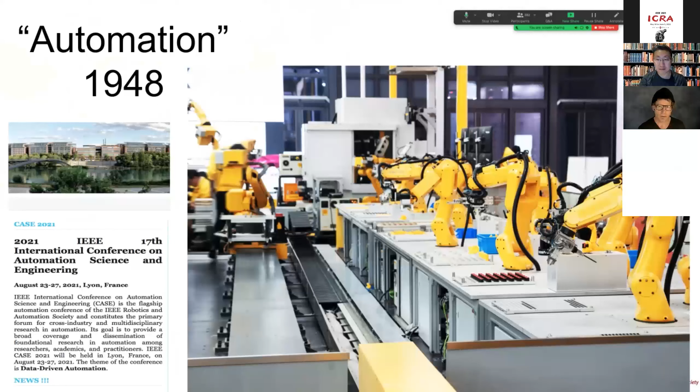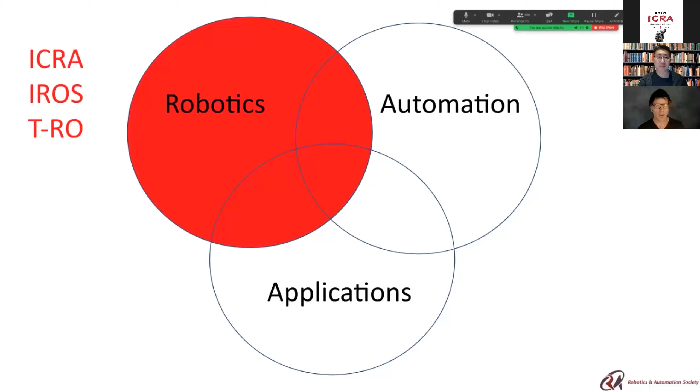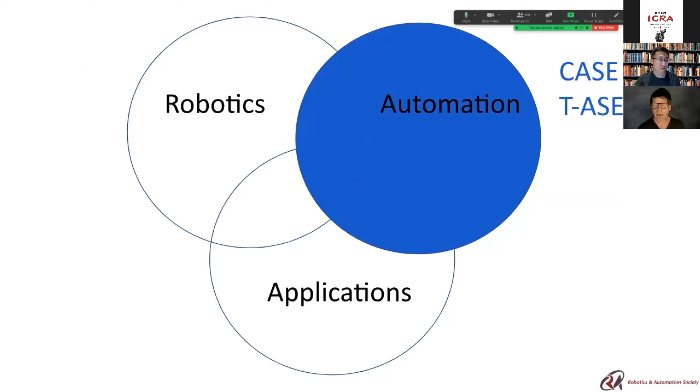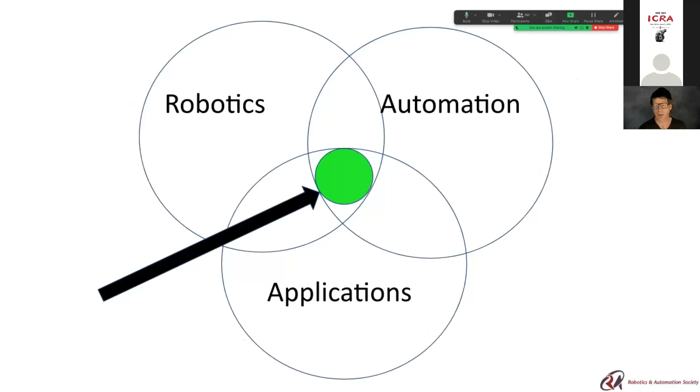So this is how we're thinking about it, that we have these 3 components: robotics, automation, and applications. Robotics, of course, is represented by the conferences, this one, ICRA, also IROS, and the transactions on robotics. And automation is represented in our society by the Conference on Automation, Science, and Engineering, CASE, and the transactions. What we want to emphasize is the excitement and potential for research at the intersection of these 3 elements.

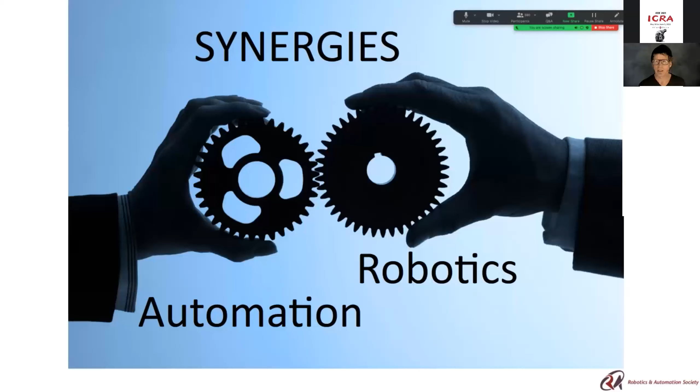So this is what we mean by synergies, namely when we start to think about robotics and automation coming together and interacting in constructive ways. One of them is in the commercial sector.

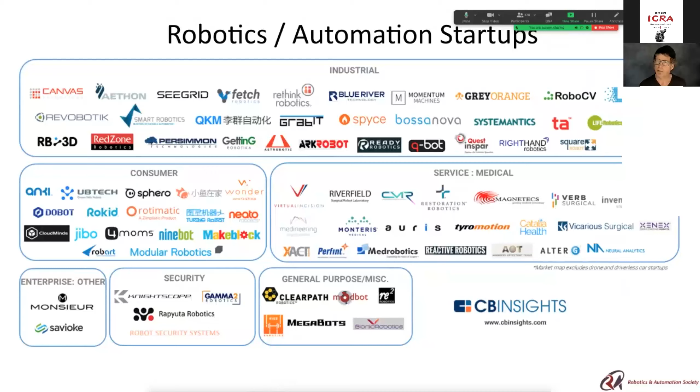Many of you are familiar with the many startups that have evolved over the last few years related to robotics and automation. The idea is essentially that automation is required to take the innovations that sometimes come out of robotics and make them more efficient, more cost-effective, more practical, more reliable. So there's a very natural synergy here. When someone starts a company, a young roboticist starts a company, they very quickly find themselves doing automation.

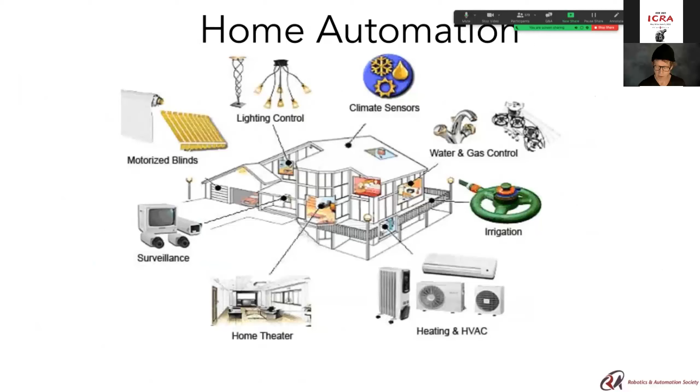Now, the term automation is very widely used in context of home automation. And we're familiar with the advances that are happening here in home automation, which are extremely exciting and starting to evolve with the advent of devices such as the Alexa and Google Home. And I also want to recognize a very exciting new project that's emerging in Japan.

The Toyota Woven City is a new project to build an entire city area that is designed for robotics and automation. Again, the idea of woven is that they're combining the elements of these two very important disciplines.

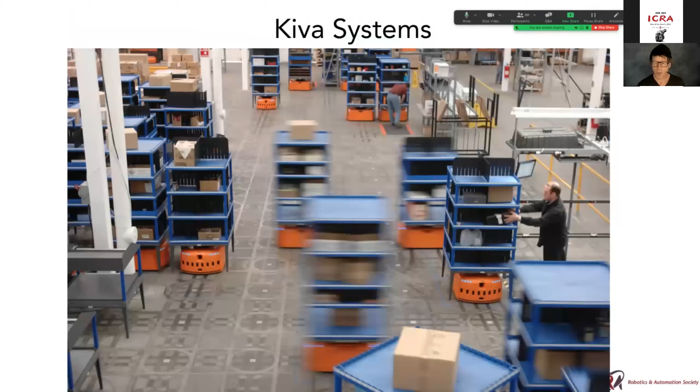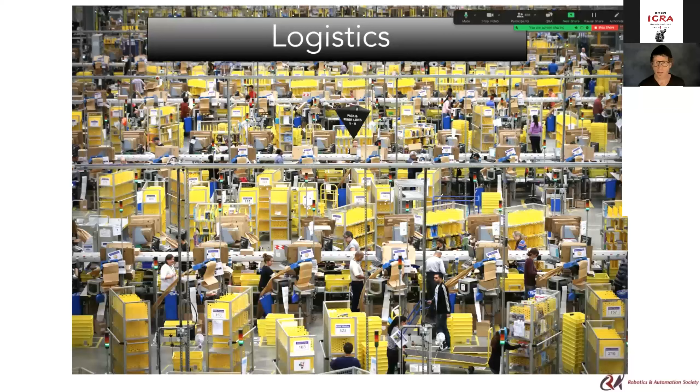We also see it in the success story of the company Kiva Systems, which has been used in warehouses now around the world. And more broadly, I see logistics as a sweet spot for robotics and automation. It's where advances in grasping and manipulation are starting to become widely applied to the growing problem of meeting the increased demand for e-commerce that has arisen during the past 18 months over the course of the COVID-19 crisis.

Now, there's a number of well-known players from around the world who think about robotics and automation, sometimes controversially. If you think about Elon Musk, he's a huge fan of robotics, and Zuckerberg has a robotics division. In a sense, though, they are both very deeply enmeshed in automation.

There's also a number of books that address the issues around automation, and often critically. So it's important for us to develop a dialogue around these topics and think about what it means for broader societies.

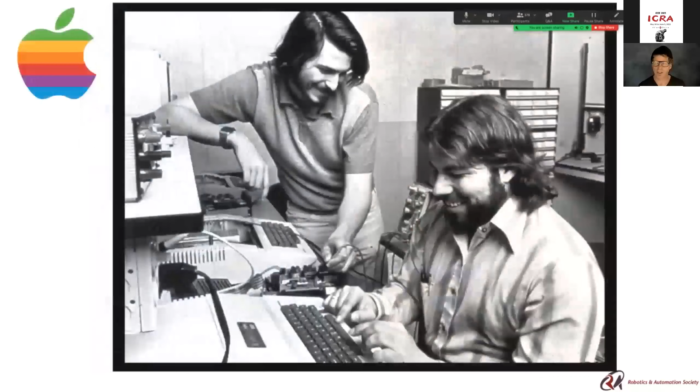Now, my favorite analogy is with these two gentlemen, the synergy between the two of them. Steve Jobs was very charismatic and very good at design and communication, but he couldn't have succeeded without Steve Wozniak, who was, in some sense, the person who got things to work, actually built the circuit boards, built the systems, and fine-tuned them and made them efficient. So that's what I think of as a great synergy, a great partnership between automation and robotics.

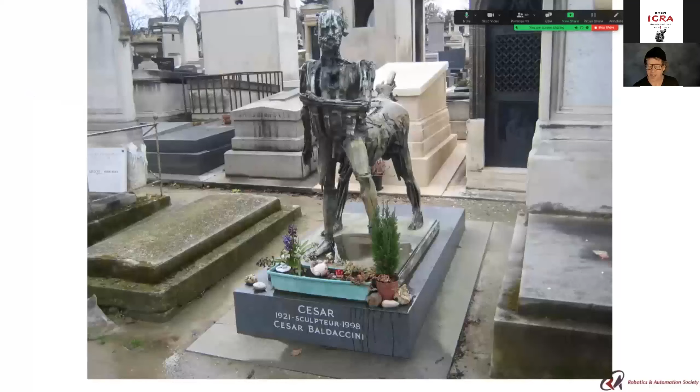So I'm going to turn the floor over to our president, and I just want to acknowledge another César, the sculptor based in Paris, who is well known for his sculptures on metal works and various kinds. And I'll turn it over to our esteemed leader, Seth Hutchinson.

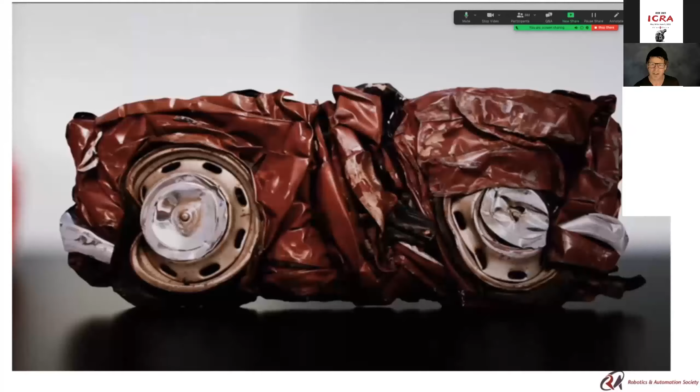Seth? Thanks, Ken. You can advance one slide. So I'm going to give you just the old guy's view of robotics and automation and how we came to be where we were.

If you joined this community in the last decade, even since the late 2004, 2005 time frame, you have always known us as two societies that somehow exist together, a bunch of robotics people and a bunch of automation people. And you may wonder, why did that happen? Why did this group of people decide to work together in the first place?

The answer is we started working together a long, long time ago. We started in 1984 as a council. And in those days, robotics and automation were really tightly coupled. If you were doing applications in robotics, there was a super high probability that the application was automation. If you were working in automation, there was a very high probability that you were trying to get robots to do things repeatedly, very predictably in factories, to assemble things or build cars. And that continued for quite a while.

A lot of the robotics research done by people of my generation, whether you were doing dexterous manipulation or intelligent planning, no matter what, you were using a robot that weighed a couple thousand pounds and was made to assemble cars in factories. So that was sort of the way robotics research was done, at least for manipulator arms back in those days.

In the 1990s, things really started to change. A lot of technologies began to mature very quickly, and at the same time, computers got super fast, and all the mechanical stuff got better as well. And so robotics started to move out of the factory to a lot of other applications, and automation started considering a lot of problems that weren't necessarily robotics-centered problems.

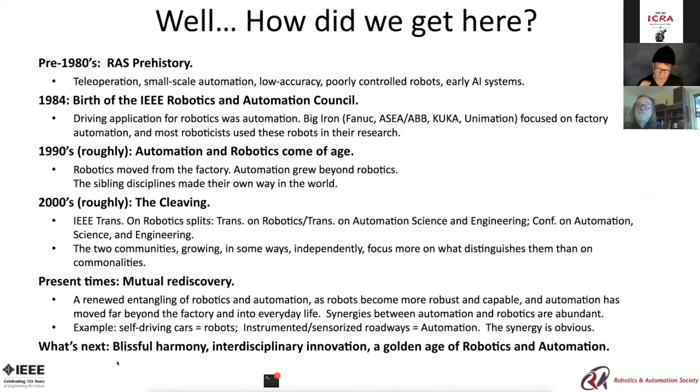Yes, I would like to start with just a review of the history of automation. The term automation is inspired by the word automatic, coming from automaton. The starting point of automation is the use of different control systems. And the simplest type of control system is obviously the open loop, the control loop.

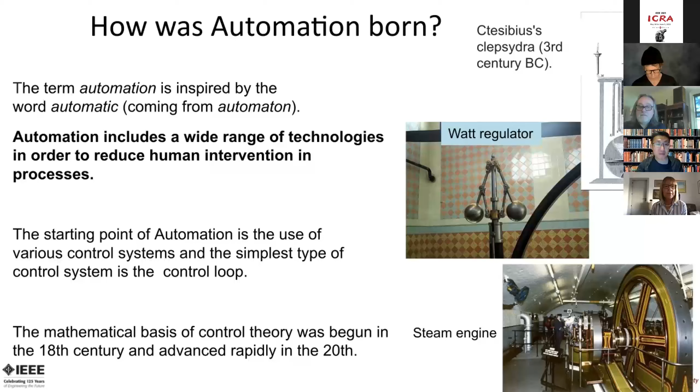The mathematical basis of automation started in particular with the main advances in the 20th century. Different issues are very important: for instance, differential equations, frequency domain analysis, stochastic analysis, nonlinear control, digital control, and so on. But in 1947, Ford used for the first time the word automation and established an automation department when, in his industry, he adopted the feedback controller.

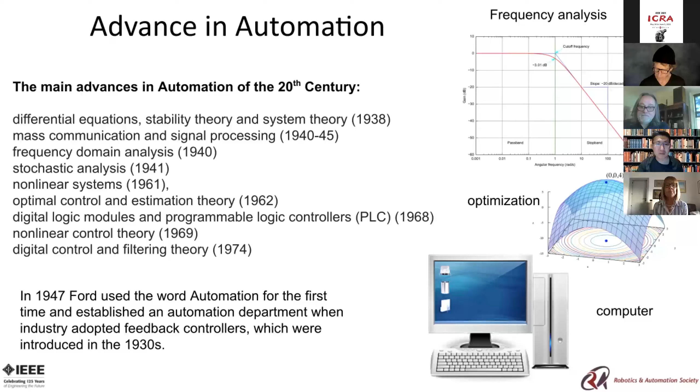Next slide. And now the modern automation tools. Modern automation tools are artificial intelligence, machine learning, IoT solutions, digital manufacturing, 3D printing, big data, optimization, simulation, and digital twins. Today, automation describes a wide range of technologies that reduce human intervention on the basis of predetermined decision criteria.

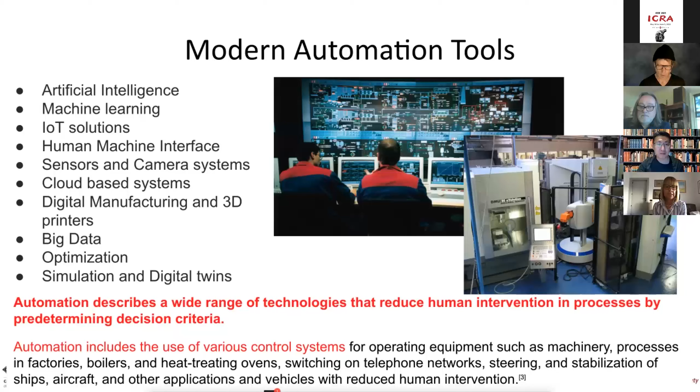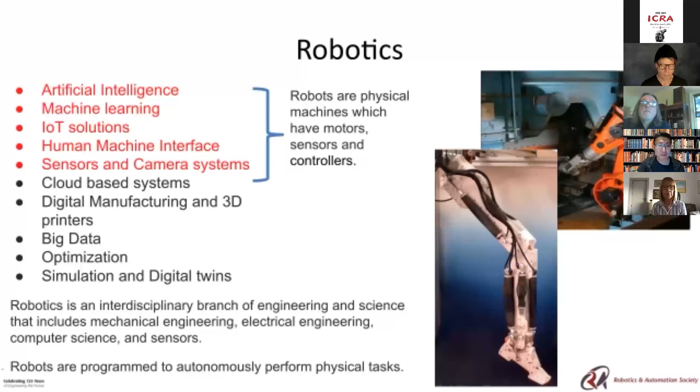Next slide. Today, automation includes some enabled technologies that are in common with robotics. For instance, artificial intelligence, machine learning, IoT solutions, human-machine interface, sensors, and camera systems. These are some technologies that are in common with robotics. Robotics can be defined as an interdisciplinary branch of engineering and science that includes mechanical engineering, electrical engineering, computer science, and sensors.

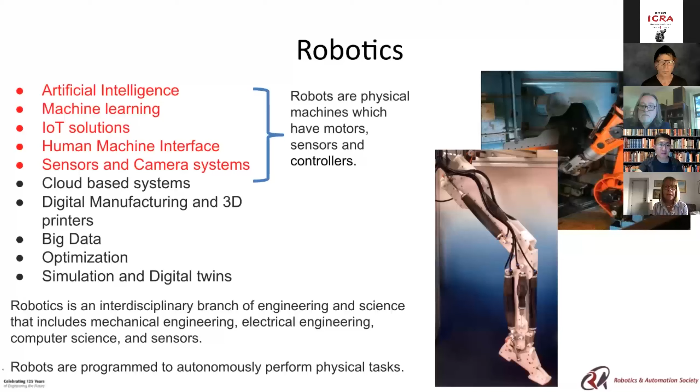Next slide. Now, it is evident that there are very large synergies between robotics and automation. Automation includes intelligent transportation systems, smart building, construction, waste management, video surveillance - applications that can be viewed as intelligent machines and intelligent systems that are not typically robots. So the synergy is very large, but also there are some fields that we cannot include in robotics.

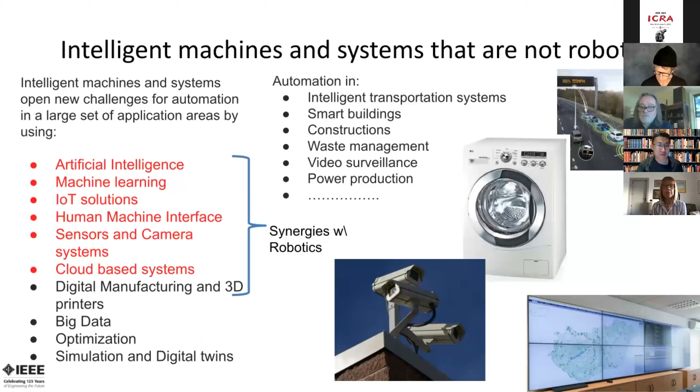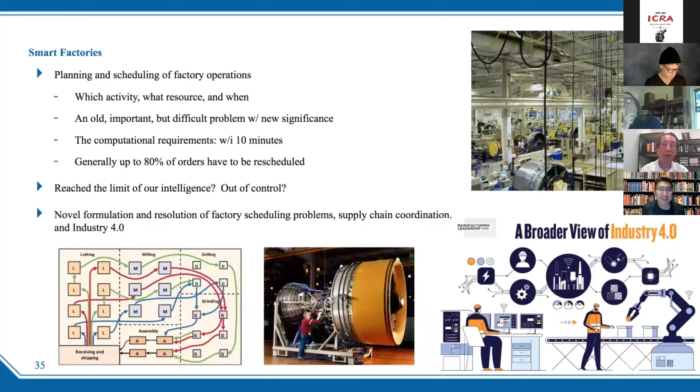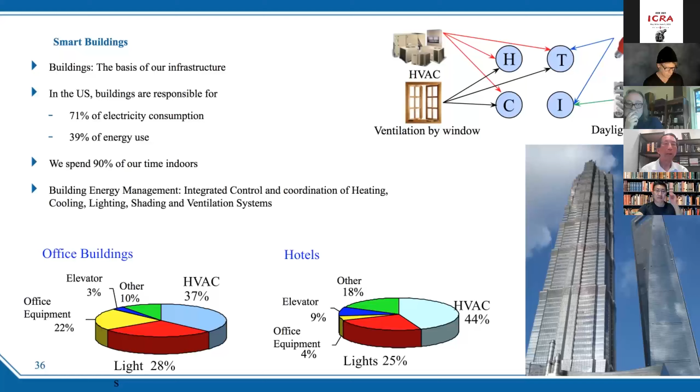So looking at what Ken and Maria Pia said, because of Internet of Things, AI, machine learning, optimization, big data, and robotics, now in addition to routine labor work being replaced, non-routine tasks and decisions are gradually being replaced. It's an exciting era for automation and robotics.

Thank you, Peter. And in fact, I greatly appreciate your point, and that's exactly what Seth has done. We have this new committee, the CSR, Committee to Explore Synergies Between Automation and Robotics. So that's what we'll be doing over the next few years. And I'm happy to say that Frank Park, the next president, is also very supportive of this. We'll hear from Frank in a few minutes.

Next, we have Pieter Abbeel, who will give us a mid-career perspective on this intersection between robotics and automation. Thank you, Ken, and hello, everyone. Thanks for joining us. So, as I was thinking about this automation and robotics relationship, for me, they really go hand in hand.

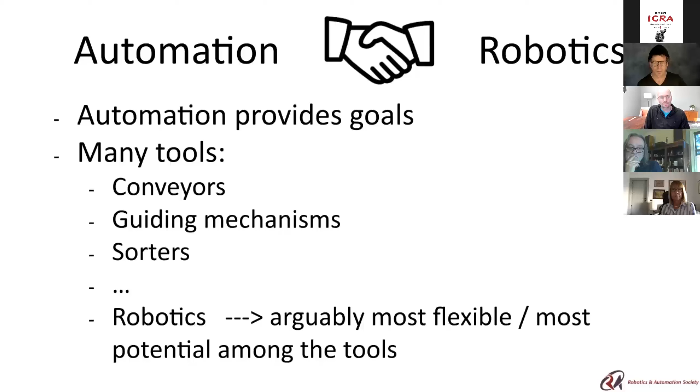Next slide, Ken. One of the big reasons I'm particularly excited about automation, and there's also something Ken alluded to, is that I think it provides some of the biggest near-term opportunities for real-world robotics. So even if what you care about the most in your heart is robots, and you'd like to see them actually do something in the real world, automation provides a lot of opportunities.

To give you some examples: recycling. Of course, we should be recycling more. Some statistics here - 80% of the trash that goes into our landfills actually could be recycled. But of course, it has to be done, and how are you going to get it done? 30% of the produce grown in our fields is actually not harvested - again, because it has to be done, but there's nobody to do it.

And the warehouses that we all rely upon to click on something online and get things delivered at our door, especially this last year and a half, the workers there have a 7% injury rate on a yearly basis and 100% turnover, meaning that people switch to a different job - effectively 100% of the people on a yearly basis. So there's a lot of need in all of these three sectors and many more to bring automation, to bring us the kind of wealth that we want in the world for everyone. Somehow we need automation to help out.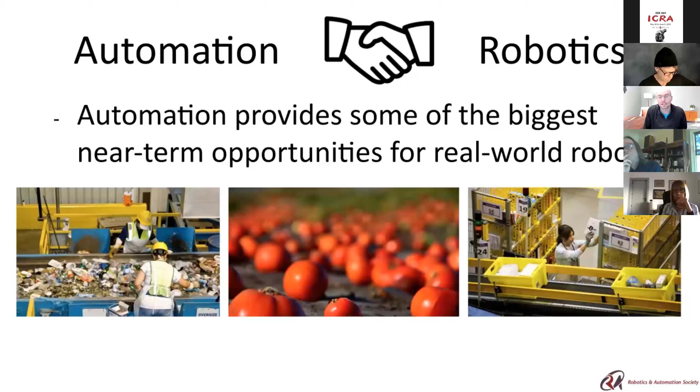Next slide, Ken. So automation is what I think of as real world problem solving. It's holistic problem solving. It's okay if the robot is only part of the solution. It's okay to use other tools, but the full solution needs to be viable.

And in fact, that can include, and will pretty much invariably these days include, thinking about the human as part of the solution—human and robot, or human and other tools together, making sure things work. Because in automation, reliability tends to be key. And it's actually, I think, a big overlooked opportunity in research to really pursue high reliability.

If you look at most papers, once somebody achieves 80, 90% reliability on a task, they're pretty happy, and they might move on to a different research agenda, a different problem. But for real world deployment, that's not enough. You need many nines of reliability. And that will require a different kind of thinking, different breakthroughs that we don't have yet.

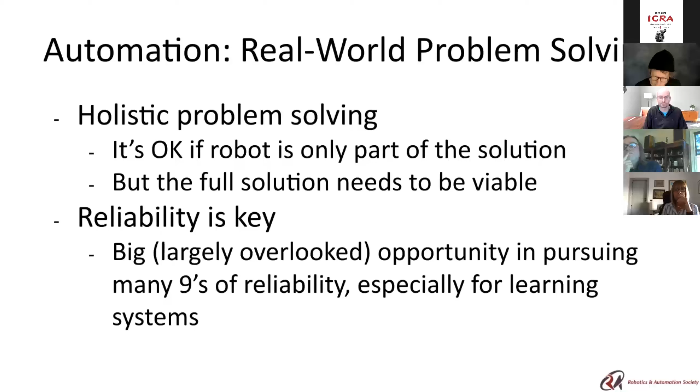Thank you, Pieter. Really appreciate your perspectives here, especially bringing up ideas like recycling, which is so timely today, and also your connections with human-robot interactions and the potential for reliability research. So thank you for that talk and perspective.

Next, we'll hear from another mid-career researcher, Kanako Harada. Kanako? Thank you very much. And it's my great honor to be part of this wonderful panel.

I'd like to share my view by taking an example of lab automation and autonomous robots for lab tasks, and I'm going to highlight the differences. Lab automation is designed to provide a solution as a whole package, for mass production and small variation applications, and works in a known and controlled environment. Such an automation system can work in a real scenario.

In these days, lab automation needs to become more adaptive for small production with large variation. In contrast, autonomous robots for lab tasks are designed by focusing on one difficult task, and therefore small production with large variation applications, working in environments with uncertainty. Unfortunately, most of such robots are demonstrated in simulated scenarios. Now such autonomous robots need to be implemented in real-life solutions. So synergies between automation and robots are really necessary.

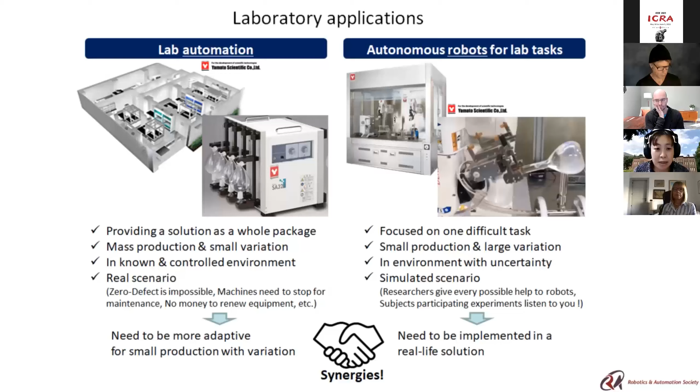Next, please. Thank you. In fact, some months ago, we launched a new project called Moonshot, targeting science discovery. We have discussed a lot about automation, robots, and humans. We think that autonomous robots capable of research automation, which requires looping of hypothesis, planning, testing, and analysis, can co-evolve with humans to do science discovery.

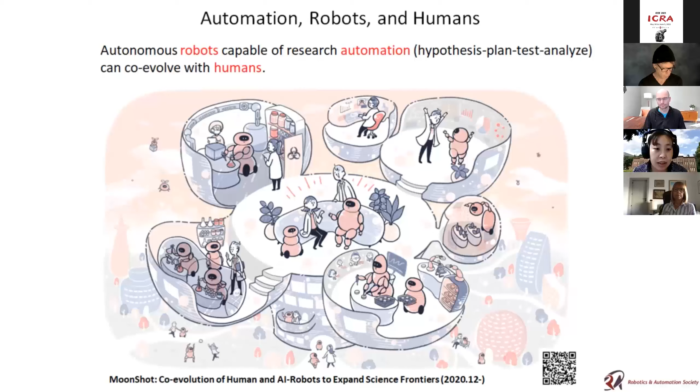We are discussing what robotic and automation technologies can realize this vision. We think that we need to study two types of intelligence: one for automation of the research or discovery process, and the other for robot autonomy. With such intelligence, robots can interact with humans. We also discussed that robots and automation technologies are not to replace humans, but to help humans go beyond human limitations—to overcome environmental barriers, information barriers, and physical barriers—to have a complementary relationship with humans. I think our community is the best place to discuss such a wonderful future. Thank you.

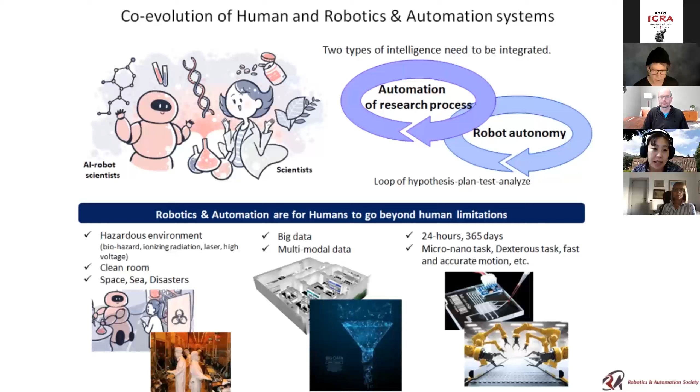Thank you, Kanako. I really appreciate this idea that automation can be used for discovery, and that it can be used in labs, and as we heard from Rob Wood this morning in his terrific opening plenary, it can be used for discovery in oceans and hostile environments. This is a very nice relationship to robotics and automation again, where automation has to continue reliability at extreme conditions.

Next, we'll hear from the current editor-in-chief of the Transactions on Automation Science and Engineering, Michael Wang. Michael? Thank you, Ken. I will just share with you my view on the synergy between automation and robotics, some of which have been shared by other members.

You probably have heard this saying that one robot is robotics, millions of robots are automation. We all know every year there are thousands of robots being sold, a lot of them in China, and there are now more than a million robots being deployed. So once you have robots together, employed in industries or somewhere else, they form a community or facility, and therefore together they do automation work.

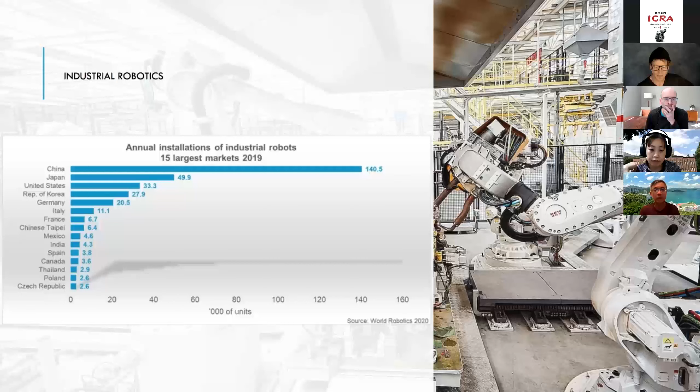Next, please. So the synergy is that the robot is not by itself—it's part of a system, either production or other purposes. There are a great deal of purposes for robots to perform in terms of automation. So I will briefly talk about three areas.

One is automated production, where millions of robots are used. The robots themselves have digital models, and they could be integrated for developing automation systems. They're also to make robots become smarter, more intelligent, more interactive. And we have new techniques involving sensors and AI. Next, please.

So in a massive production system, robots are part of the system. They are optimized, and their performances are tuned such that an entire automation system produces the most product in the most economical way. Reversely, giving the performance limits as well as other requirements such as reliability, the whole production system is optimized around whatever is in the system.

So in terms of the whole product design to product delivery, robot is a very important integral part of it. And there's a great deal of opportunity where the digital twin comes into play. We have virtual representations of robots as well as other production machines, and they are integrated to simulate the operational performance. With real-time data, we are able to tune the parameters of these machines as well as robots to make them more reliable and much more productive.

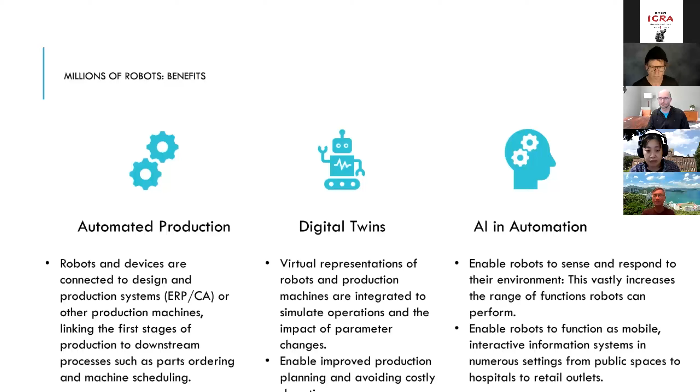Excellent. Thank you, Michael. I also want to give credit for that analogy to Raja Chatila, our past president of the Robotics and Automation Society, who made this point about one robot being robotics. When you scale robots to tens or hundreds or thousands or millions, that's when you get into automation. So this issue of the scaling transition leads us into automation. Next, we'll hear from Chinwe Ekenna to give us another junior perspective on this intersection.

Chinwe? Hi. I'm also going to give a little bit about what I think and what my view is about this synergy between automation and robotics. I'm going to take it from a slightly different perspective, where I'm looking into extending beyond to where there's actually a dire need.

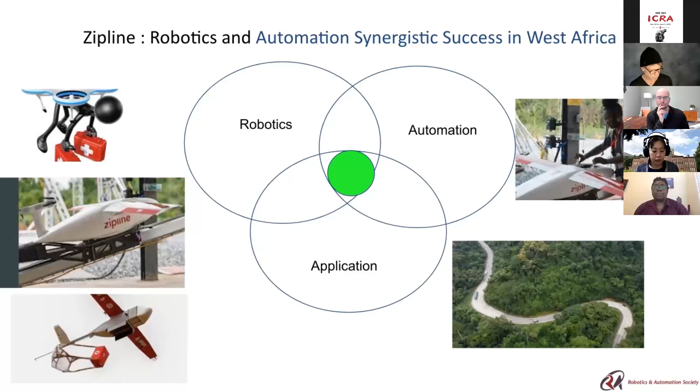So, next slide please. Even with that, looking at one of these preliminary successes we've had, there is actually a lot of room for improvement. There's a lot of room where we could have this kind of interaction become very useful and really make a change in people's lives.

Another area could be shipping. In some parts of the world, the bottleneck there is that a lot of work has to be done. So I'm bringing up some potential areas where we could see this synergistic process and prospects being very useful.

Agriculture is another one. There's a lot of research in robotics and agriculture, thinking about reapers, or automation within the farm, within the farming environment. Looking at agriculture even in these very remote areas, and how we can bring in robotics and automation, is something very worthwhile if you think about the near future. Healthcare as well, as we all know.

So this synergy basically has the potential to bring a myriad of positive changes in different sectors. Finance is also included. It will actually bridge the gap between physical infrastructure inadequacies in certain parts of the world and consumer demands, and it can free up some skilled labor, and in that sense also increase labor productivity. That's basically my view, really looking beyond towards where we could see a dire need and where the success of this synergy would actually come into play.

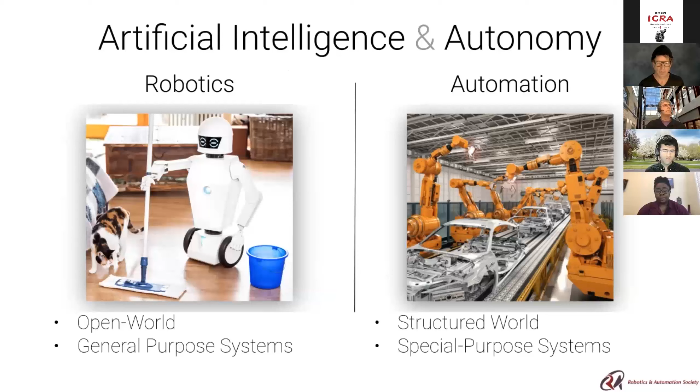However, over the last decade, progress in autonomy, improved hardware and sensing, and algorithms in AI have blurred these boundaries. In fact, I would argue the notion of AI itself is more about ambient intelligence to support the many spheres of our activity, whether it is at home or at work. These spaces will operate not only with robots as we know them, but probably also devices that are smart, in the sense that there are multimodal sensing, perhaps other modes of control. Your curtains are automated, or as Pieter pointed out, automated material sorting in a factory. In the same way robots are stepping out of the lab, we can also see automation is increasingly stepping outside the cage into applications with fewer structured constraints.

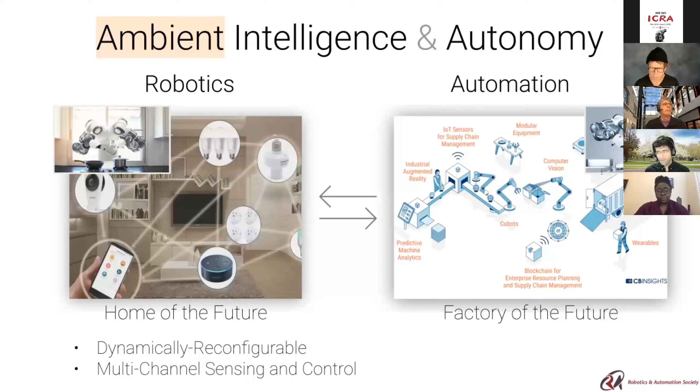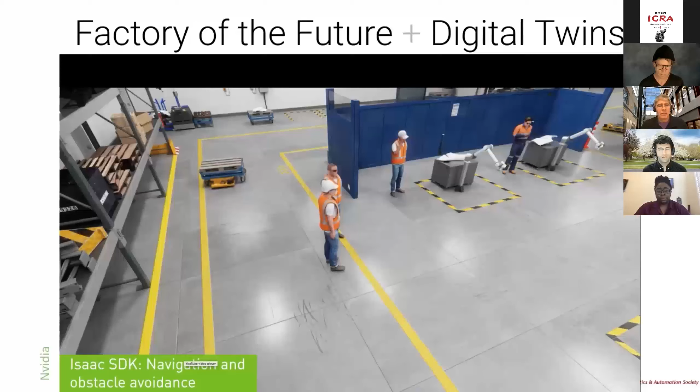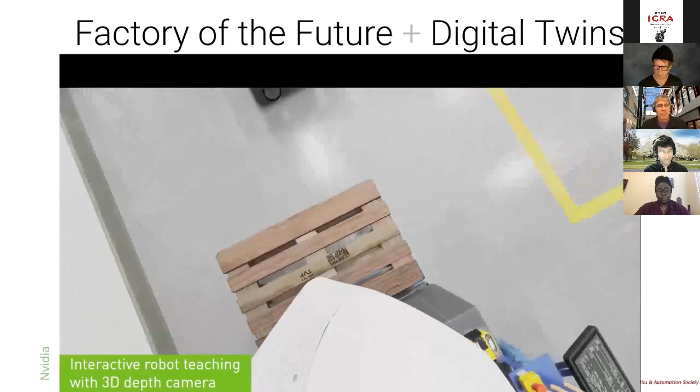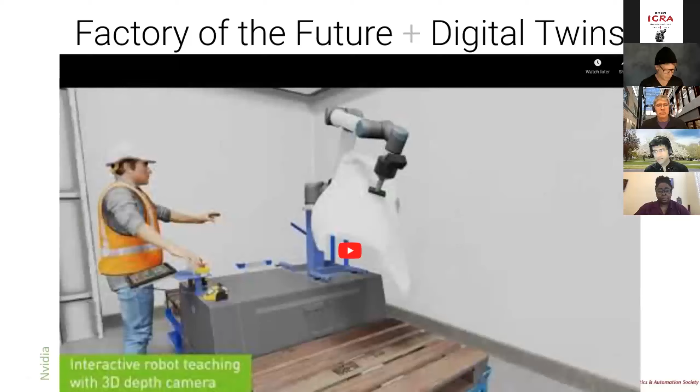So a classic problem we can use as an example is the factory. An automated factory needs operations that include material handling, assembly, finishing, which in turn may require autonomy in manipulation and mobility. Often roboticists may scope the problem to either just navigation or manipulation operations at a station, maybe grasping objects in a bin. On the contrary, automation may need to study the holistic problem of material handling in a factory, of which bin picking is definitely a very vital part, but it may also need to look at the context-aware decisions that need to be made in view of information coming in from many pieces of equipment in the factory. And now the things we're building in terms of these digital twins allow us to solve these problems jointly, both automation and robotics.

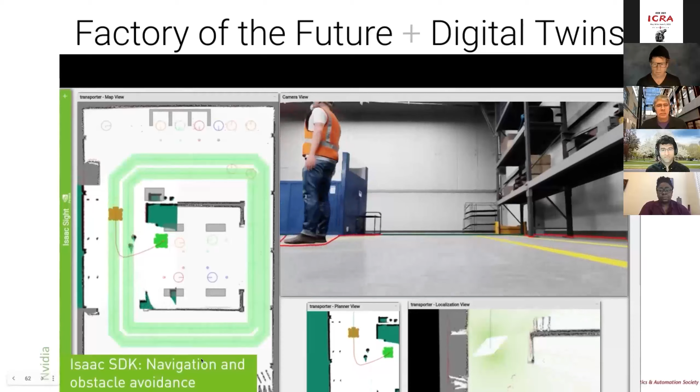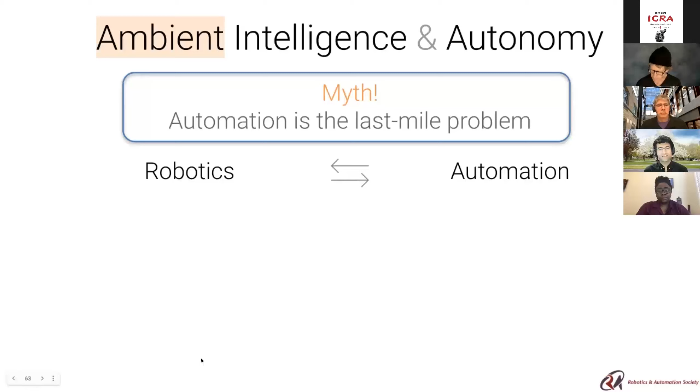As we build toward a framework of this ambient intelligence and autonomy, a myth that has plagued the community, I would argue, is that automation is a last mile problem, that it's just engineering. I would argue that actually both robotics and automation each have technical problems that are equal parts science and engineering. Robotics has technical problems such as how to build better decision-making systems, improve robot control and design, and also build a higher level of cognition and reasoning. On the contrary, automation has questions like how do we build context-aware awareness from network sensing and control, how do we build algorithmic methods for quality assurance, transfer and few-shot learning. Importantly, as Pieter pointed out, uncertainty quantification and even long-tail performance guarantees, to get the right number of nines we need. As roboticists, I would argue the path to achieving impact in our work is very likely going to be hand in glove with progress in automation.

To finish up on a lighter note, many of us in the robotics community have been solely focusing on building the Iron Man suit. But it wouldn't be half as impressive without the context-aware automated assistant that we call Jarvis. So I would argue that embodied AI in physical environments needs both robotics and automation, not one or the other. Thank you.

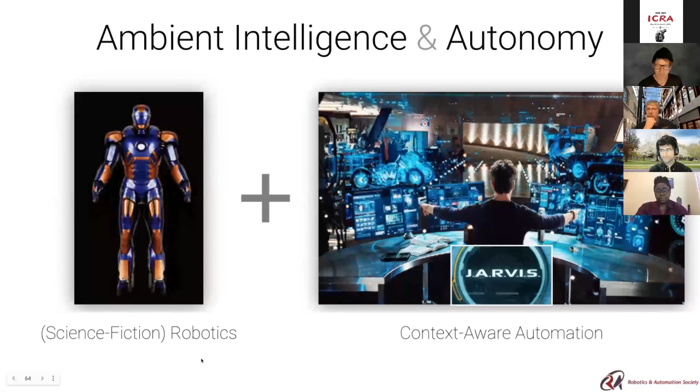I'll be brief. I would regard this event and others like it to be a failure if we just ended up congratulating ourselves and each other for our observations and insights about robotics and automation, and then we just went back to what we were doing before, and this event just becomes an archive video somewhere. We need concrete plans that put into action many of the great ideas that our panelists proposed.

Not only more discussions like this, but long-term sustainable activities that engage both the robotics and automation communities, especially our younger members. I hope that people who primarily consider themselves roboticists and only attend ICRA and IROS and publish in TRO and RAL consider attending CASE and submitting your works to T-ASE. I think it's very important. I'd like to see the editorial boards of our robotics journals, TRO, but especially RAL, have better representation of members who consider themselves more mainstream automation.

Hopefully we'll see more articles and special issues addressing topics that help break down these barriers that exist. I'd like to ask the automation community also to be more inclusive and receptive to more traditional mainstream robotics. Many of the papers on grasping and manipulation, bin picking for example, that we see in TRO and RAL, I think they could just as easily be at home in T-ASE and CASE. I'd like to see more events like startup fairs and boot camps organized by our Industrial Activities Board, for example, that bring together the two communities and break down these barriers.